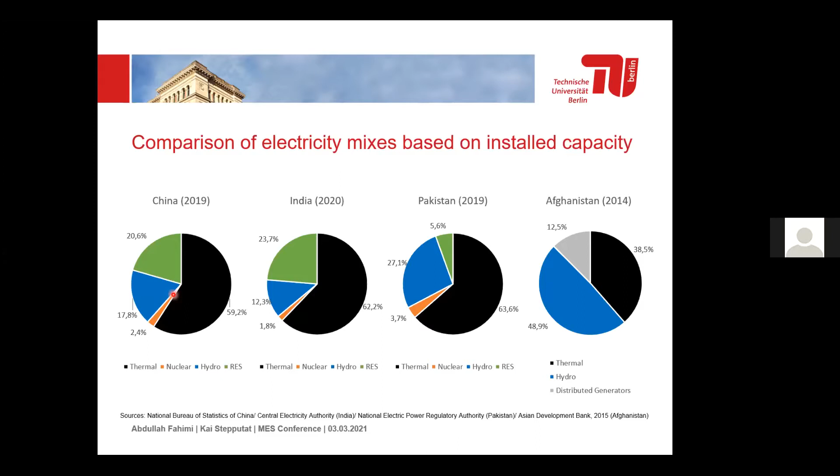Regarding the countries, just want to give you a quick overview about the capacities in China. They have about 1,200 gigawatts of thermal capacities there, which is a gigantic amount compared to India, with about 200 gigawatts, about a fifth or sixth of China's coal capacities. Also interesting, India has still about 20% of their total energy supply coming from biofuels and waste, whereas for China this share is quite low, about 3.6%.

So, all in a nutshell, we try to assess the strategies of China and India regarding the low carbon energy transformation, and according to the World Energy Outlook, regarding China, the projected emissions are about 3 times as high as permitted in the Sustainable Development Scenario. There are also ongoing high investments into fossil fuels and expansion plans of Chinese coal plants, not only domestically in China, but also in neighboring countries. Abdullah will talk about that as well.

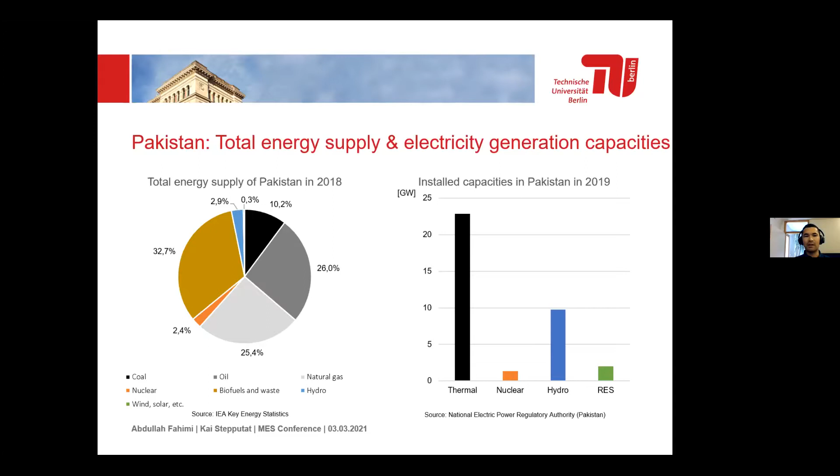So I will continue from here. As you can see here in this slide, Pakistan's energy mix is quite heavily dominated by fossil fuels. On the right side, for example, you see thermal projects, the ongoing projects and projects under construction, many of which are based on fossil fuels. Nuclear is also gaining a big share now, becoming a big source, and renewables are also being implemented, but the share is not so big, as you can see in the charts and the pie chart.

Regarding Afghanistan, it's an interesting case because 80% of its electricity is imported from northern neighbors, that's Uzbekistan, Tajikistan, and other countries from Central Asia. So domestic production is only around 520 megawatts, which is a really small number. And only around 30% of the population is connected to the grid, although rural villages do have access to electricity, but not through the grid.

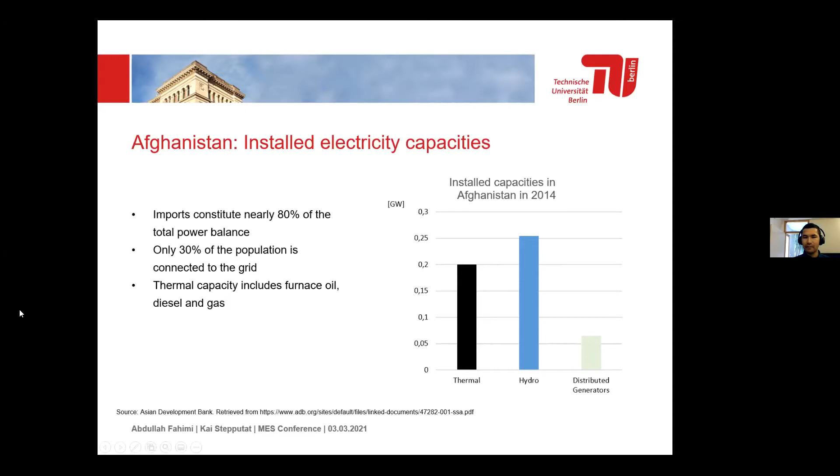There are some thermal plants, basically diesel generators in big metropolitan cities like Kabul. As for the domestic production capacity of 520 megawatts, almost 50% is hydro, large hydro from large dams which were built during the Soviet Union years, but also prior to that, and they've been rehabilitated over the years since 2001. The thermal capacity is mostly diesel generators, and also a gas-fired power plant in the north of Afghanistan. The share of renewables is really small and doesn't come up in the statistics, not because it's too small, but because data on Afghanistan is really hard to find.

Here we wanted to discuss the low carbon energy transformation in the region: what are the barriers and what are the trends? Of course this has been talked about a lot during the conference, that the cost of renewables is coming down and it's already competitive, some of these resources already competitive with fossil fuel sources. So I don't think we need to talk about this anymore.

What we want to talk about is that in all of these countries, including Afghanistan, there is not reliable data on fossil fuel subsidies. But for Pakistan, China, and India, we found data that there is substantial support for fossil fuel still, and this support amounts to billions of dollars in all three countries.

Another factor, and another trend which could also prove to be a barrier to low carbon energy transformation, is the Chinese influence in the region and its investment. Due to time constraints, let's talk about only Pakistan, for example. Next slide, please.

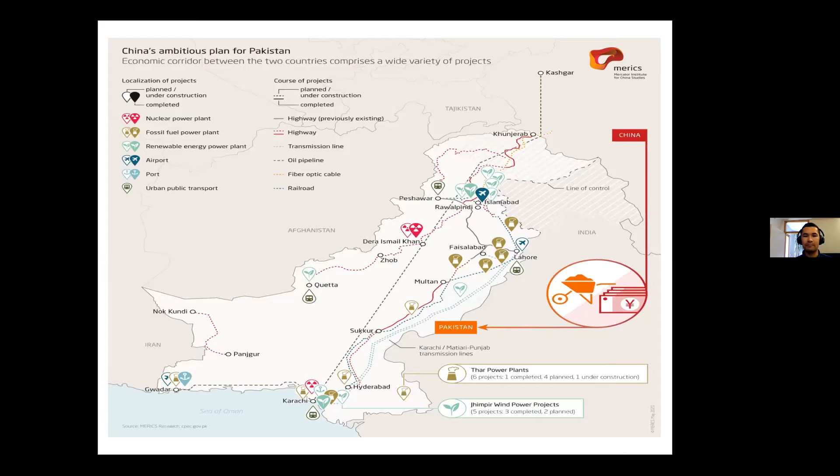Another trend which we could think of as a barrier to low carbon energy transformation is the energy transfer projects from Central Asian countries to South Asian countries. Central Asia is considered an energy-rich block of countries because of their huge fossil fuel reserves, and South Asia is considered an energy-poor region, but with a huge population.

There are now many regional projects, and we listed three of these major multi-billion dollar projects. For example, CASA 1000, the Central Asia South Asia Electricity Transmission and Trade Project, is part of a bigger arrangement called the Central Asia South Asia Regional Electricity Market. This project is based on surplus hydropower plants from Tajikistan and the Kyrgyz Republic, which will go to Afghanistan, passing through and giving some electricity to Afghanistan, but most will go to Pakistan.

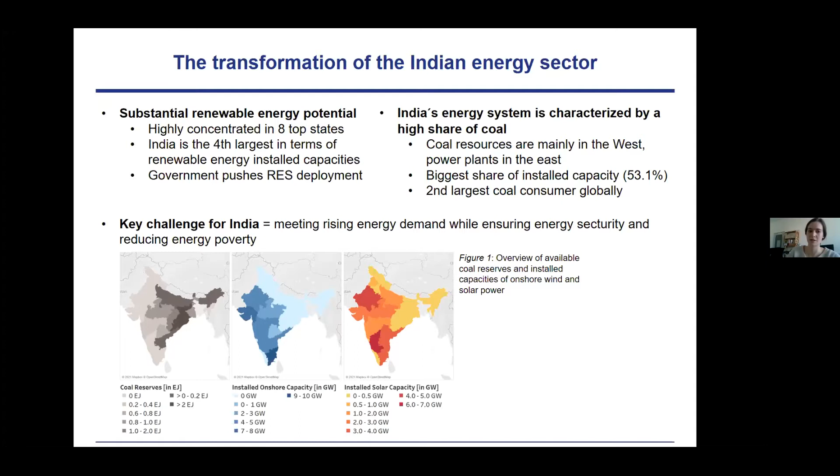Keeping this all in mind, we wanted to analyze the development of the Indian energy system under varying CO2 constraints, and therefore looked at the sector-coupled energy system, including the power, heating, transportation, and industry sectors at the state level for India, using the open source energy system model GENeSYS-MOD.

I will now talk a little bit about the research design—basically the model and the scenarios that we looked at.

Here you can see the model design, technologies, and data used in GENeSYS-MOD. The model is a linear optimization problem where the total system costs of a given energy system are optimized for a time horizon. Pathways are computed with the model determining the cost-optimal capacity addition, supply mix, storage uses, and energy flows. I will not go into more detail—if you have questions, you can ask them later or send an email.

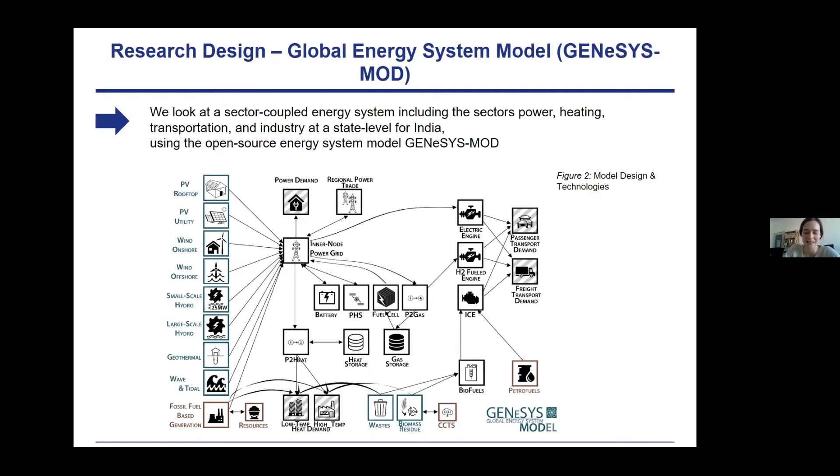We looked at 2 scenarios. First, the delayed action scenario serves as a base to compare the impact of a CO2 budget on the Indian energy sector development. This scenario does not include any carbon budget, but instead showcases a least-cost approach, performing only a techno-economic optimization of the transformation of the energy system without special consideration for CO2 emissions. In contrast, we compared this to a 2-degree scenario, focusing on the fulfillment of climate targets with a budget for India that is compatible with limiting global warming to 2 degrees Celsius.

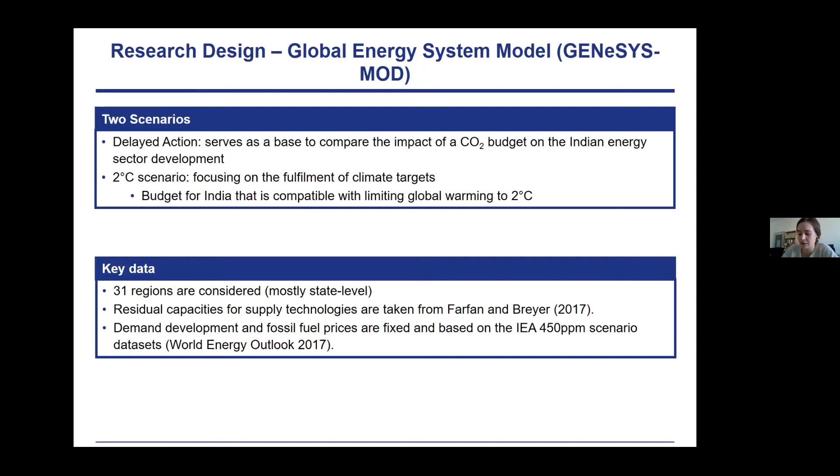We considered 31 regions comprising the 28 states and the Union Territories of Delhi, Puducherry, and Jammu and Kashmir. Data is mainly taken from government sources as well as from leading institutes and academic literature.

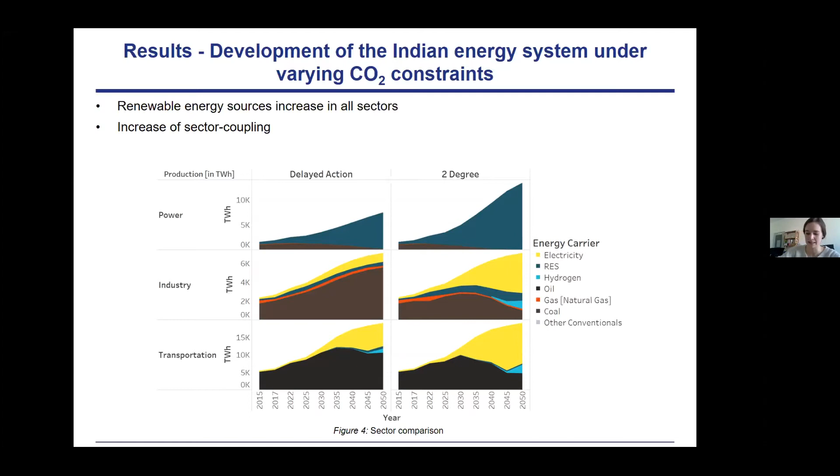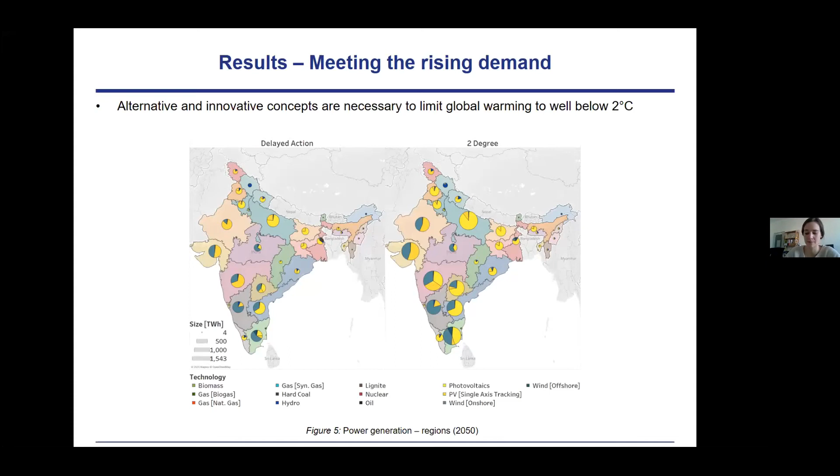And we can see that offshore plays only a small role and is seen in the southern part of India. So the last slide for the results is the results in context of climate ambition.

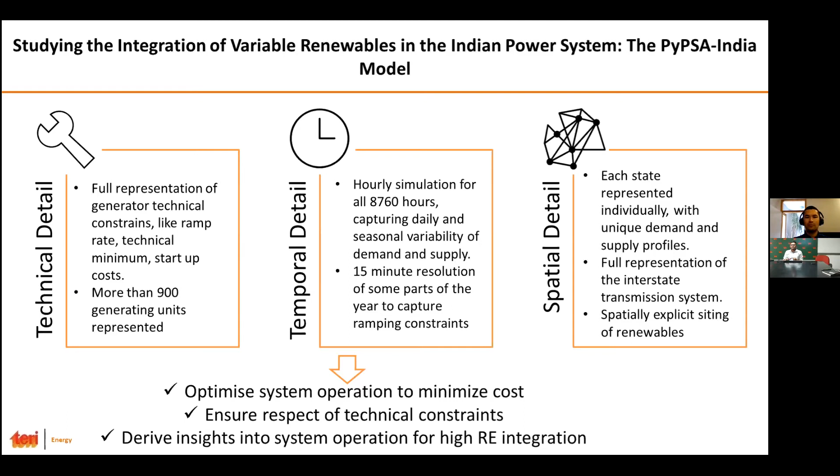Further, in the model, we see that it is very important to look because each state in India here represents one node. So accordingly, we have a full representation of the interstate transmission system. Each of the generators and the demand has been represented by each state. So if we look at the demand and supply numbers for year 2030, we have two broader scenarios.

If we look at the baseline scenario and the high demand scenario, we look at the peak demand which would be there by year 2030. We estimate 303 gigawatts of peak demand in the baseline scenario, estimated using the 19th Electric Power Survey that the Central Electricity Authority of India publishes.

When we look at the generating capacity in our model, we have a baseline capacity which is currently in line with the policy targets of India, and also the high renewable energy scenario, which envisages the target of achieving 450 gigawatt renewable capacity by 2030. So that is again optimistic.

Now if we look at the scenario framework, as already mentioned, in both scenarios we have 26% and 32% variable renewable generation in the mix. And here we look at the power system flexibility with various perspectives.

Here we look at the degree of thermal flexibility that can be provided by the central and state generating stations. It is quite interesting to see that the central generating stations in India are owned by the central government, and they have a high degree of flexibility, whereas the state plants have a higher technical minimum. So this is a very huge challenge in terms of managing flexibility later on, which we'll see into the results.

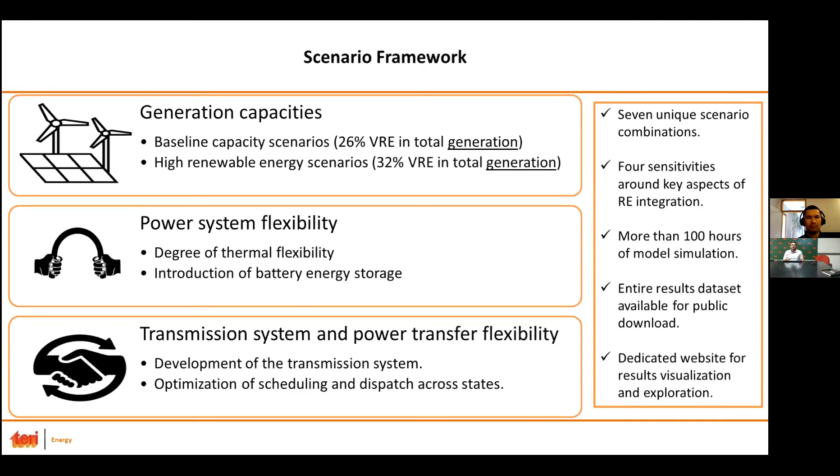So here is a broad representation of scenarios that we represent in our model. Our research question is on the grid integration of renewables, with the two scenarios being the baseline and high renewable energy. Looking at flexibility, we look at different kinds of flexibility scenarios.

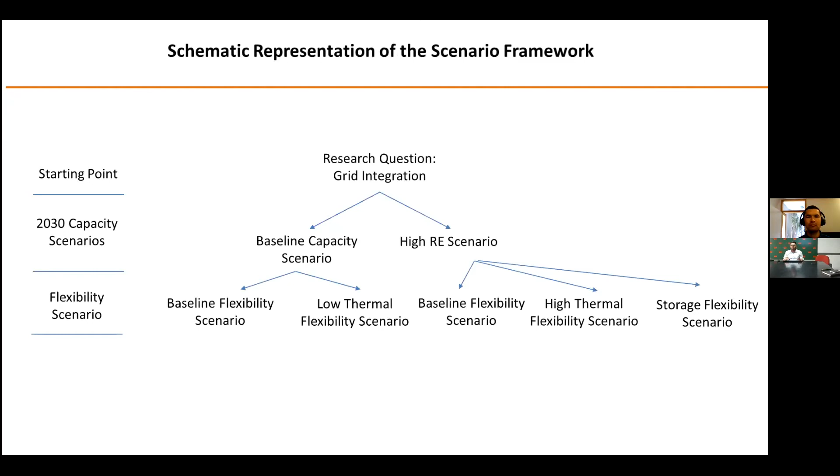In terms of the low thermal flexibility possessed by the state power plants, and high thermal flexibility represented by the central generating stations, we further look at a scenario where energy storage is represented in the model and how it can help further in providing the additional ramping requirement and flexibility when India has an evening peak, which requires a high ramping rate. These are the questions we have tried to answer in our model.

Further, we have addressed this through the transmission scenario. Here we have an unconstrained and an expanded transmission scenario where we try to look at the power flows required for year 2030, and an unconstrained transmission scenario where it is quite comfortable to transfer power between the interregional and interstate lines without any further constraint.

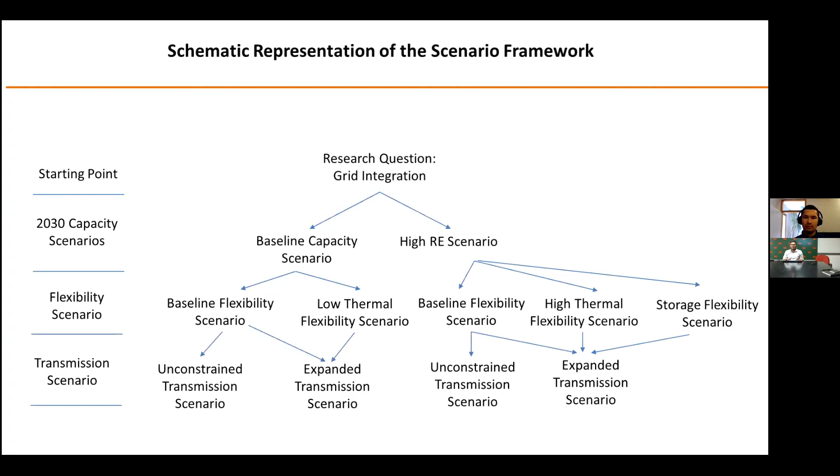So now we'll try to see the key messages that come from the model. First of all, we look at the broader picture of the conventional coal and hydro fleet. Here it plays a very crucial role in the short term. On the left, you can see the representation of a dispatch stack.

The nuclear and coal fleet mostly provide the base load. However, the role of coal power plants has been looked at in a picture where it can provide additional flexibility and not just a baseline load.

Also, in the purple stack, you can see the hydro pondage. India has a large amount of hydro power plants, and mostly it can be seen that it is used to meet the early morning and the peak demand during the evening. So this is highly represented here.

Achieving this is mostly required by addressing the technical minimum of coal power plants that we have seen in the model. By achieving a 55% technical minimum, it is highly beneficial. Further, we see a policy push for two-shifting of thermal power plants for some units, because continuous operation of the plant is not feasible during the day. So a few technical interventions are required that need to be addressed.

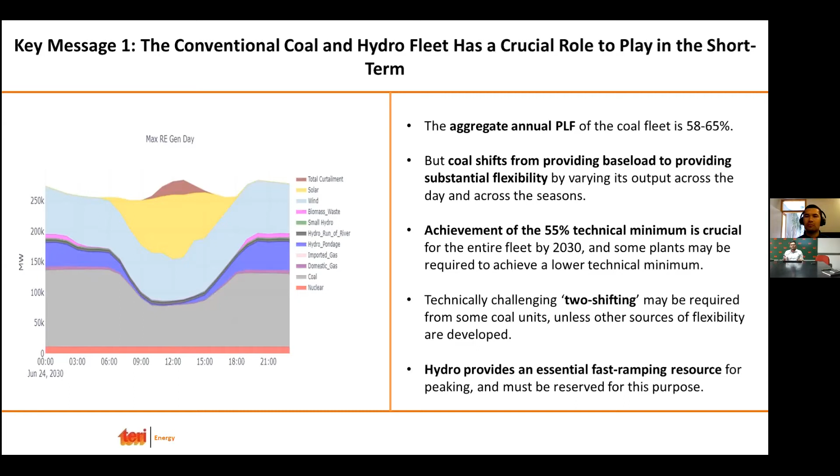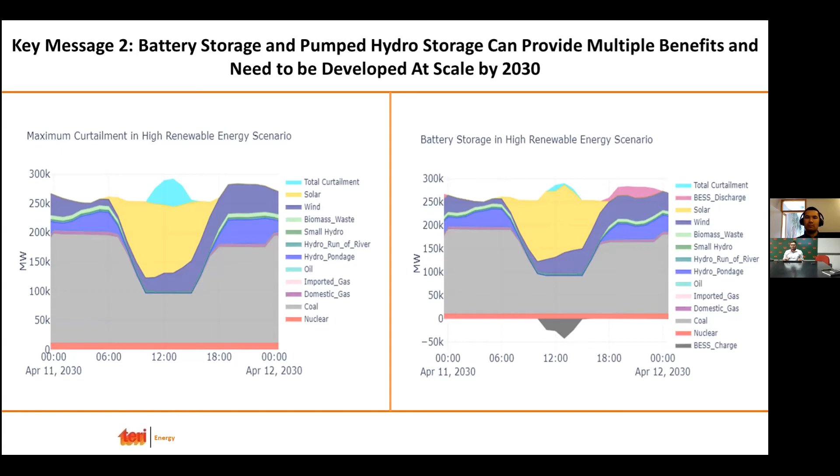So here we see an important message that integrating the regions and having a synchronous grid is quite beneficial for India. Another key message is the role of the total system cost.

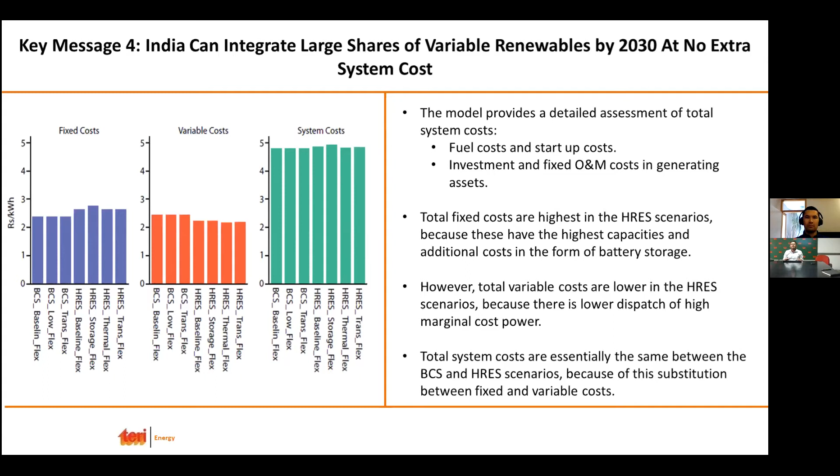Thank you very much, Shubham, for this very interesting presentation. It looks like coal is playing a big role, but we leave the discussion to the next presenters, Professor Mufazzal Hossain and Dr. Mirza Rasheduzzaman. We ask them to come online and discuss the presentation given by Shubham.

Thank you. Can you hear me? Yes, yes, we can hear you.

I just forgot to actually introduce you. I think Professor Hossain is not presenting, so it's Dr. Mirza Rasheduzzaman, an assistant professor in Bangladesh. He's an assistant professor at Bangladesh University, and he has a PhD and a master's degree from Sheffield University in the UK. The floor is yours.

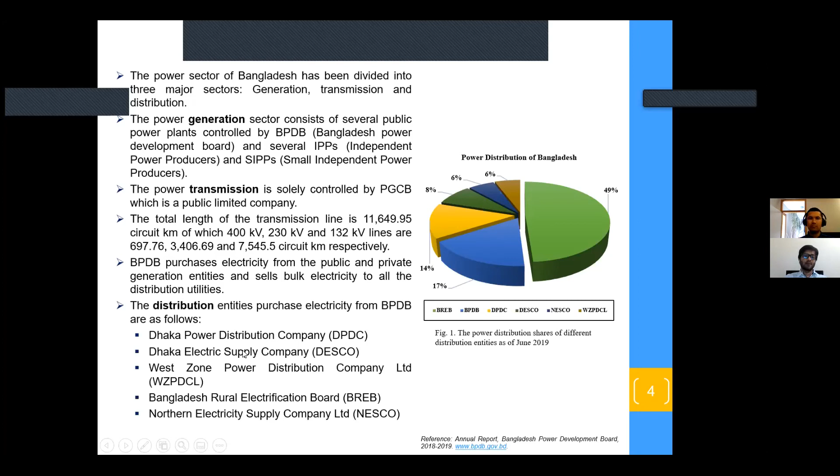This is the power distribution of Bangladesh. As you can see, DPDC has 14%, and the other companies have the rest of the share.

As we talked earlier, Bangladesh basically generates most of its electricity from fossil fuel, and among those, gas accounts for 58% of electricity generation. Then we have furnace oil at 25%, coal, diesel, and a very small share generated by hydro, with some electricity imported from India. In terms of technology, the major share comes from reciprocating engines and combined cycle at 38% each, and steam turbine at 12%.

There's something I want to mention: although we talked about the solar home system in Bangladesh, as part of the national grid, electricity generated by solar cells is very negligible. However, the government has taken the initiative to generate 10% of electricity by 2021, and very recently, a 70 megawatt plant, the largest solar-based power plant, was implemented and connected to the national grid. So the government is working on it, and hopefully we'll see more electricity generated by solar photovoltaic.

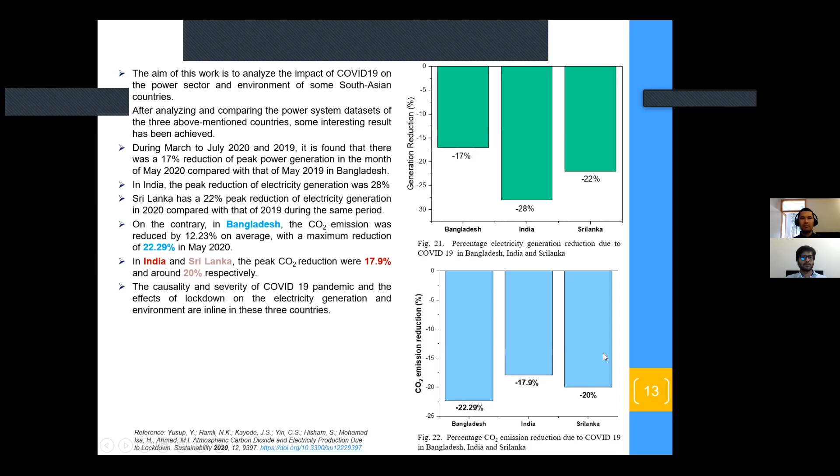So yeah, I'd like to conclude here. Thank you everyone for listening.

You can now stop your screen. Thank you very much, very interesting presentation. There is certainly a lot to catch up on and a lot to discuss. I found it especially interesting that in Sri Lanka, for example, the transport sector uses so much electricity.